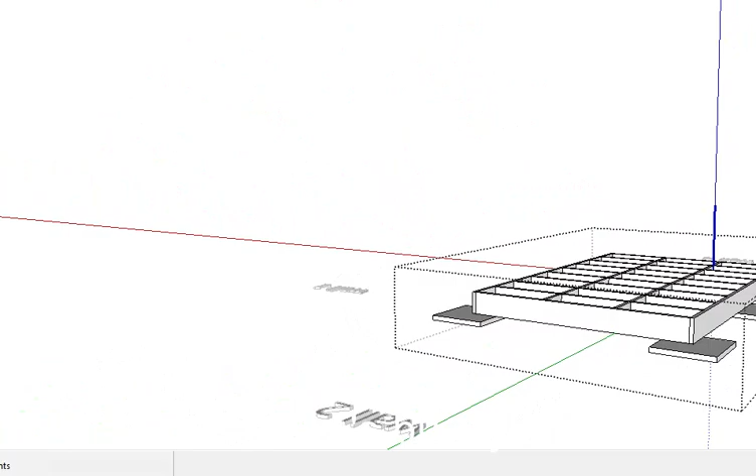First of all, I got a foundation here, and the foundation this time will be a little bit smaller. Last time I made 2 by 12s, but I think this is such a small place that I'll try to do it with 2 by 10s, which is 9.25 inches.

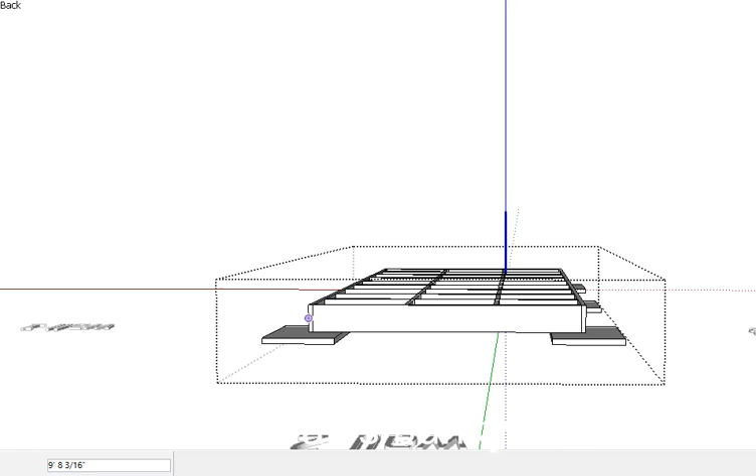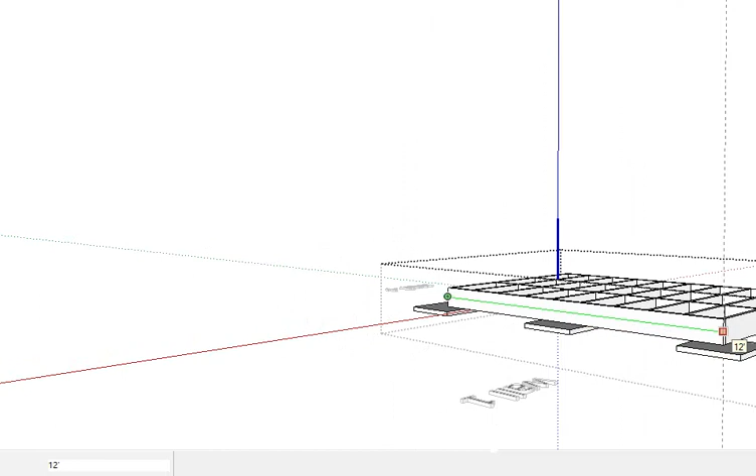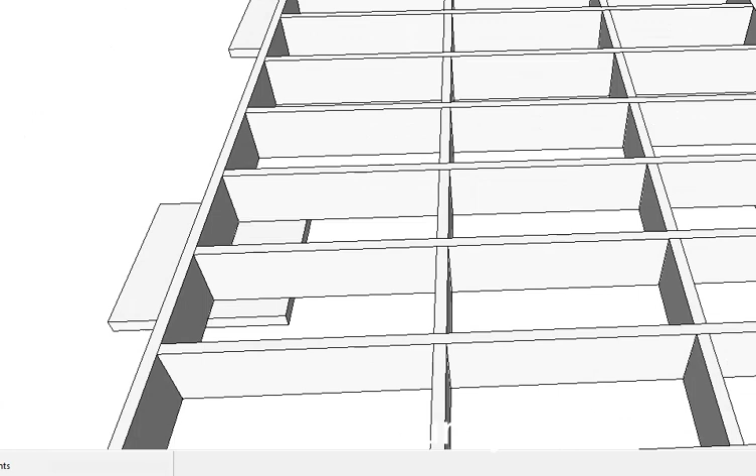The other thing I've got going for me is I've got to keep it to 8 by 12 - 8 feet wide by 12 feet long. It's only 8 by 12, and I think 2 by 10s would be plenty strong enough for just a little cabin like this. As you guys know, Matthew and Valerie, I just put the boards in here to make sure it doesn't warp or anything, and that's all done too, with cement pads underneath there too.

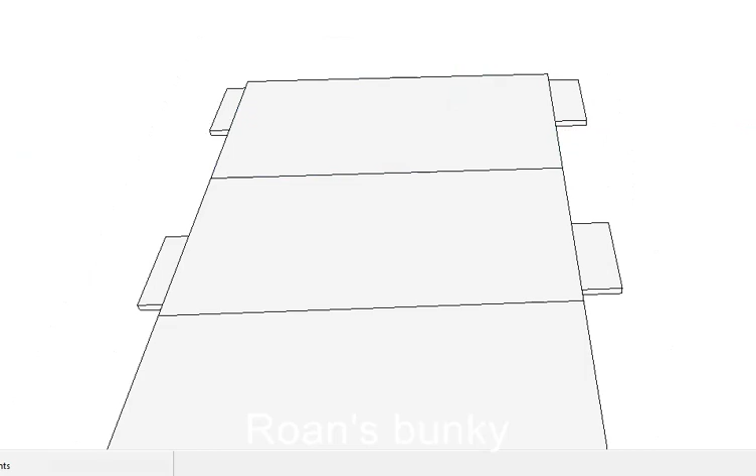Then for the subfloor, I put in the usual tongue and groove. It's a tongue and groove plywood, and I only made it 3/4 inch thick, I believe. Yeah, 3/4 inch thick, so that's good - that's all that's needed there.

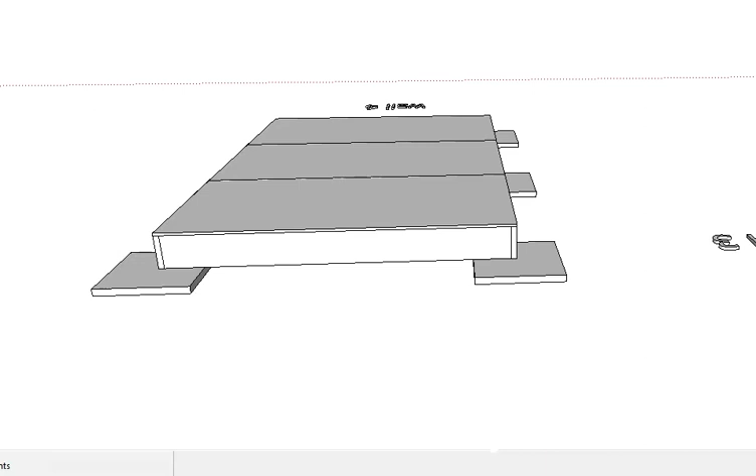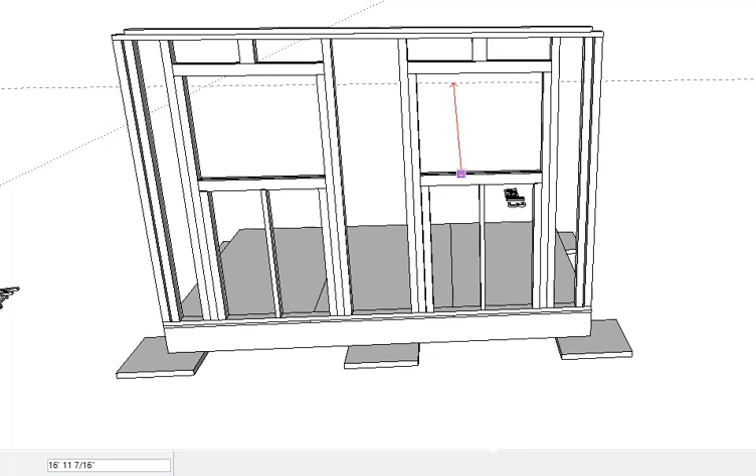And 2 foot 8 and 7/16 tall. So those are good big windows, I think that'll suffice. Anyway, this can all be changed, this is just a start.

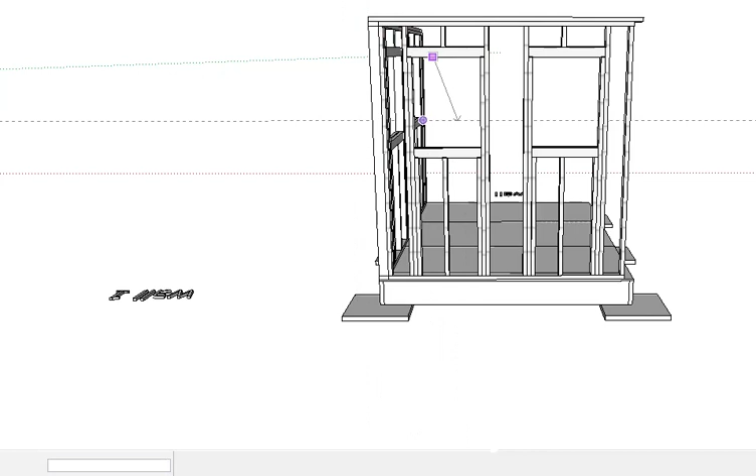Let's do wall three. Wall three is the same way, its windows are a little bit smaller on this side, but that's not a problem, that's the way it goes. Two, 2 and 3/8 inches by 2 foot 8 and 9/16 inches. That's the only way I could make it all fit together.

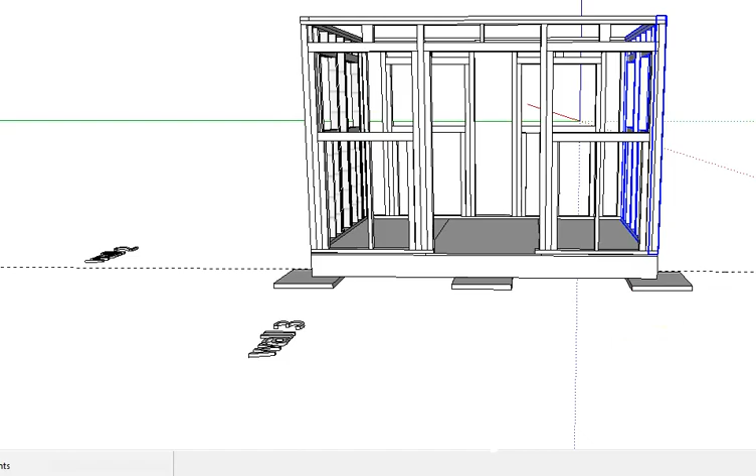And with the fourth wall here, same thing, same windows as on the other side. So you've got lots of windows and we can put screen windows in there or whatever we need - I think that'll be perfect.

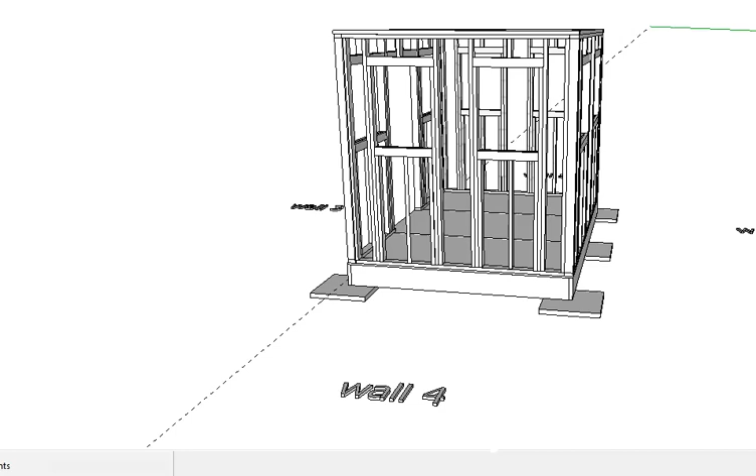So then we go into - let's put some plywood on that. So if we put plywood all around the house, except for that wall there, I'll get that fixed right away. So there we go.

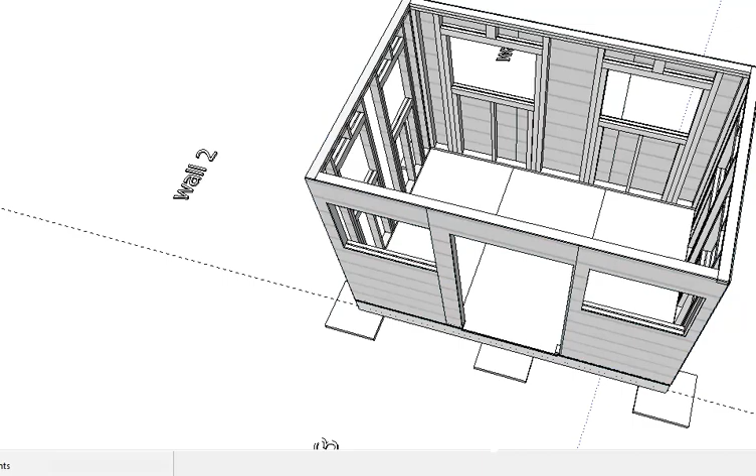Now fix up the inside - we have to put gyprock. Well, I wouldn't put gyprock on here. Of course, I put gyprock in there for your program, but it's not going to be heated all winter long - you should never put gyprock in a place that's not heated. So this would have to be a different kind of wall type. I would say whatever - you guys know as good as I do. With that being said, I would put...

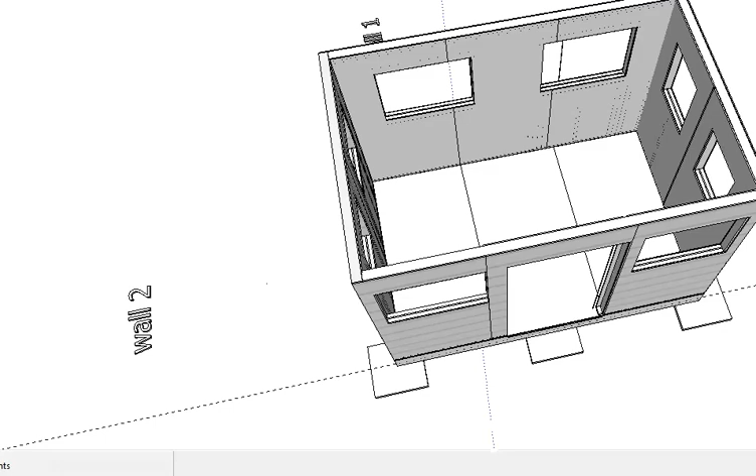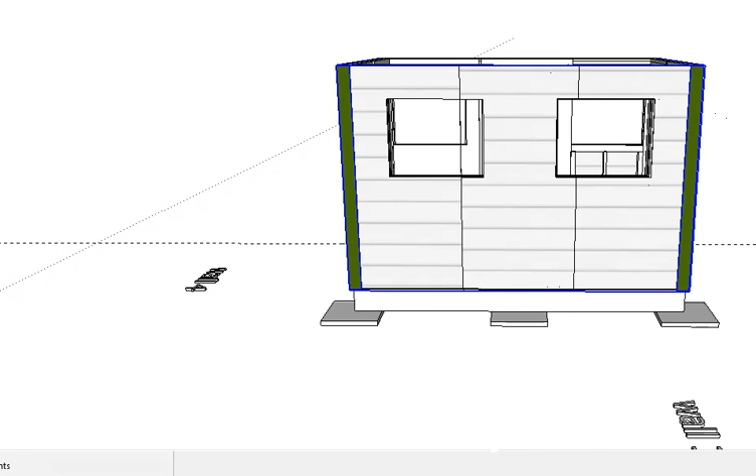Let's put rafters on here. Okay, we put some rafters on, and this took a long time to do. I put an 8 by 12 pitch on these. I think all Canadian houses are trying to go 8 by 12, just because of snowfall and everything else. It took a long time to design this, but I think that'll work fine.

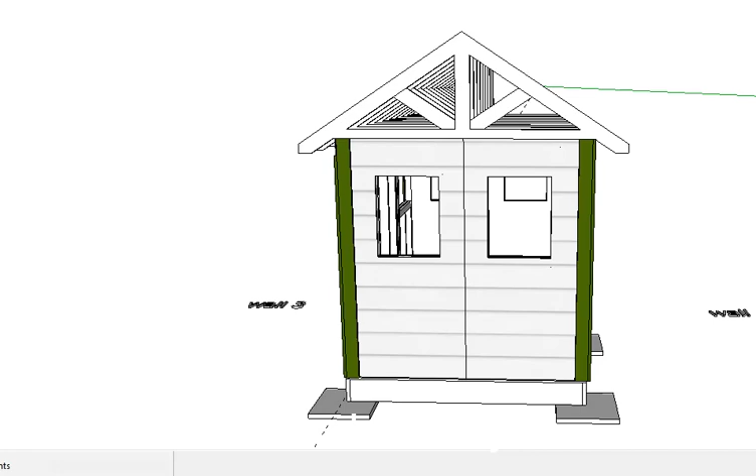And of course you got to fill in the undereaves here too. I'm not sure if I did that. Okay, let's try here. Yeah, when we build it, Maddie, we're gonna have to put on the undereaves too.

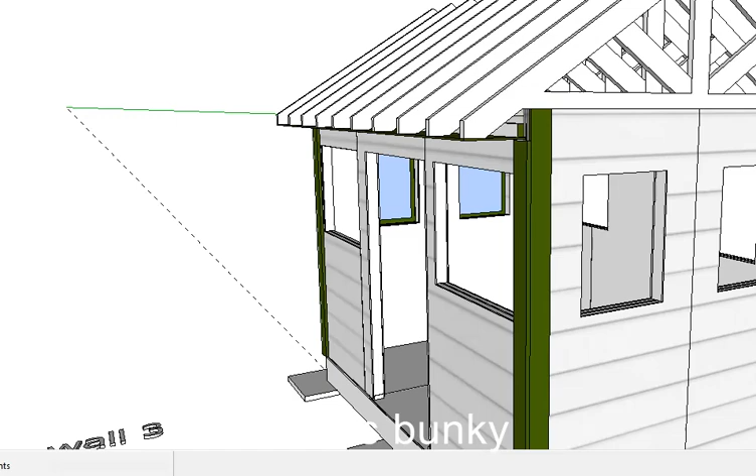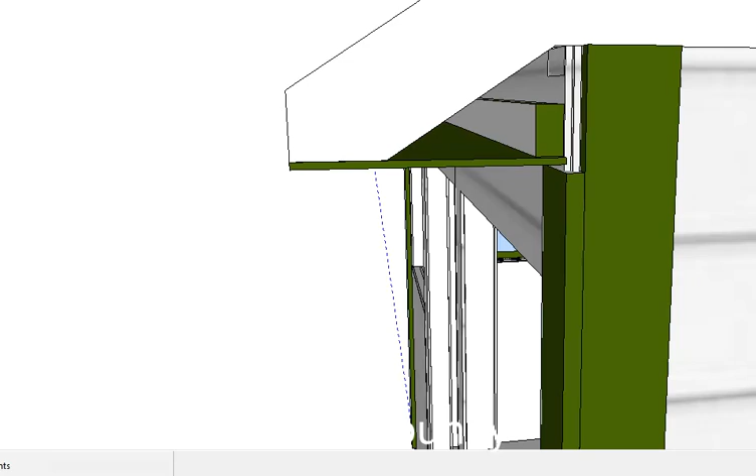This is old school, of course. Trust me, used to make sure you build these rafters. When you build these rafters, you have to have a flat spot here and a flat spot here, so you nail the wood onto here, and you see a 2 by 4 going along this wall here. So you can just nail it to the bottom of this 2 by 4, and if it's the right level and everything else, you just nail it to the rafter here too, and that would make a lot of sense. That's the old school way. There's got to be better ways of engineering these things these days, but that's what I know.

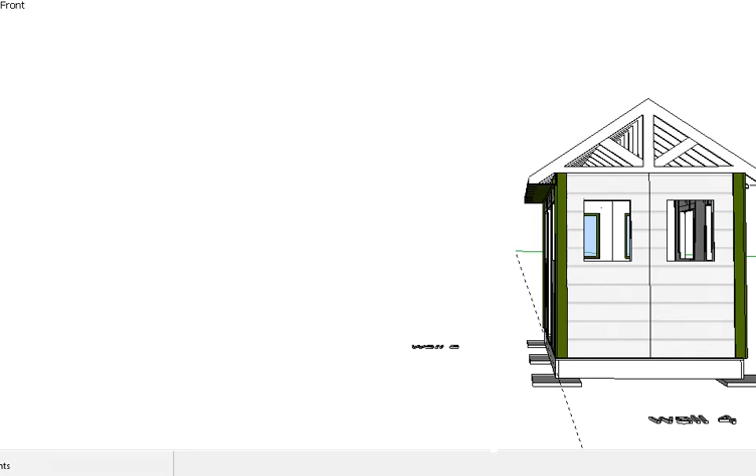Okay, what else? Oh, windows and doors. Let's do windows and doors first. I put all windows and doors in, as you can see, and it allows you to see through the building and everywhere. Well, what do we need with that?

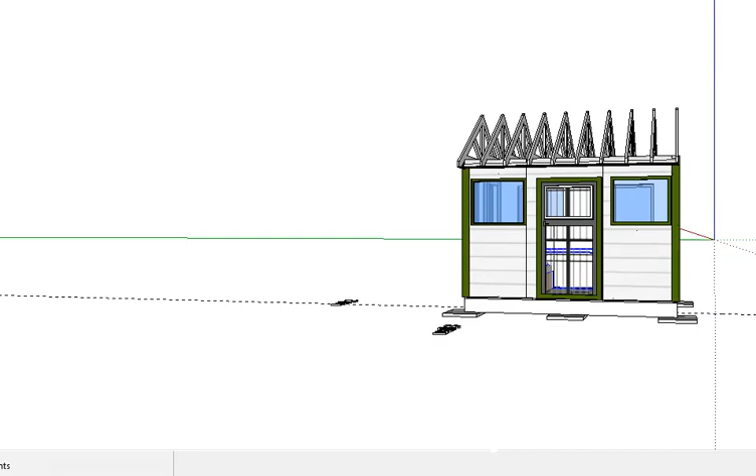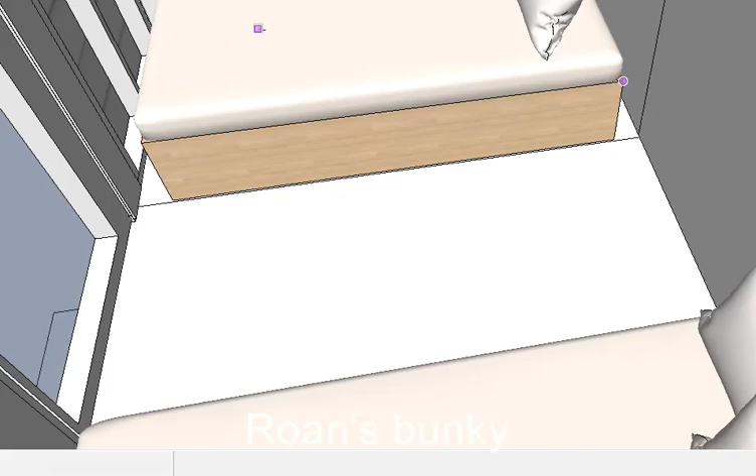We need... beds, eh? Yeah, there's 2 beds in here, and that's all you got room for is 2 beds maximum. What I did was make them big enough for one person to sleep in. It's 6 foot 5 inches long, which should be enough, unless you got a mammoth in there. And the other one, how wide would it be? I had this all measured out at one time, and this would be 3 foot and 3/16. So that's a good enough size bed, and there's equal beds, both the same size.

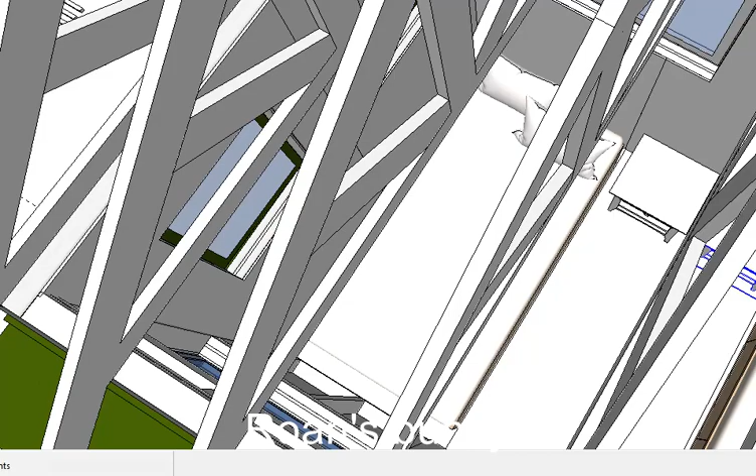That's one thing I'm doing. Oh, I see what I did. Then what I did was put on little tabletops, little table-side bedside tables. So there's one there and one here, and now of course you need lamps with that. So there's your two lamps too.

Maybe I can see better through the door here. Can I? No, I can't. What the heck? Oh yeah, there we go. I'm just getting used to this program still, old man. Anyway, yeah, there's two beds, good size, and two bedside tables with lamps, good size.

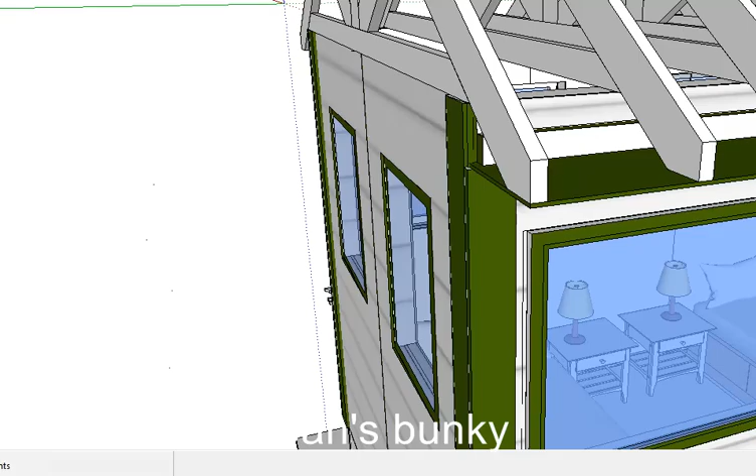So I think that's all good. What else does this little house need? Well, of course you're going to need... here we go, what's this? Flowers. You're going to need flowers for the front of it there, and I don't usually do that at all, by the way. So that's your flowers.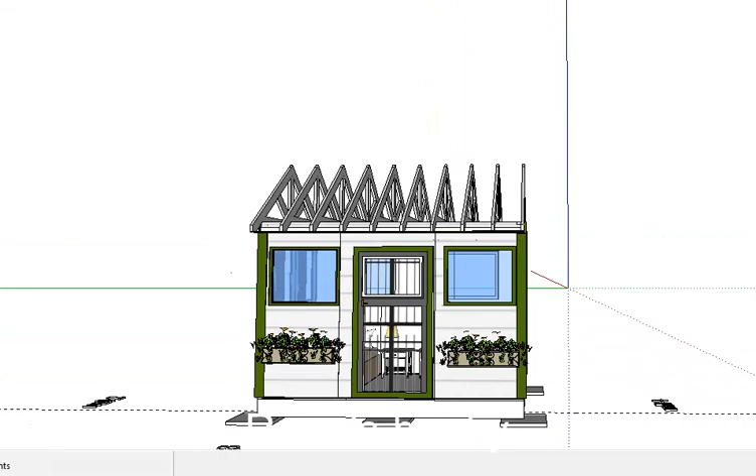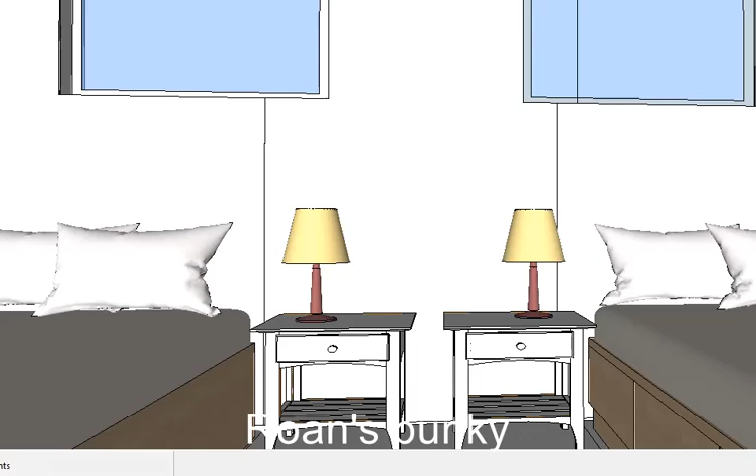So that's your bed. So if you come in the door here, I think you'll find it very cozy at night. I always take this bunk over here. By the way, not sure who's sleeping with me. Okay, that's about it, I think. Yeah, that's it, guys. So I'm gonna get out of here, and that's Roan's bunky.